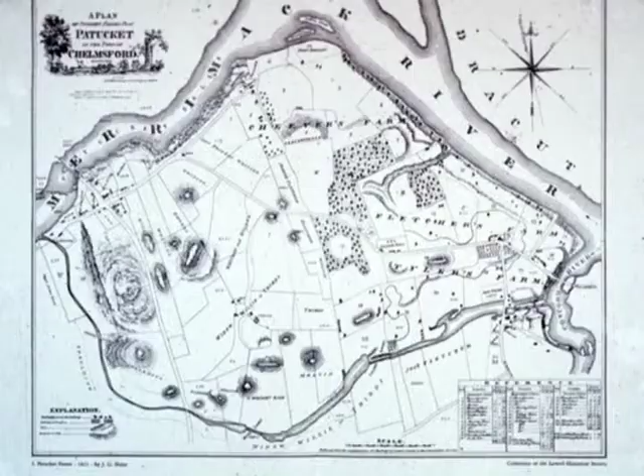In 1821, the situation in this area was shown on a map by Hales. And this particular map identifies the falls. You can see the Pawtucket Canal, which goes around the falls and into the Concord just before its junction with the Merrimack. And there's also an interesting feature on here. There's a contour line, which is the height of the river above the falls. And that's really important in the planning of the mills that would be put in place here.

The Boston Associates secretly bought most of the land between the Pawtucket Canal and the river. They then formed a new corporation, the Merrimack Manufacturing Company, to manufacture textiles. And they placed its first mill to use the full drop of 30 feet. So they're putting that mill over here, and they're going to use this transportation canal to feed a series of power canals. The Merrimack Manufacturing Company, with this full drop, had what they considered an ideal location.

But they had plans for up to 60 mills in all. So this is really going to be an enormous transformation. This particular image came from the Center for Lowell History. And this next map came from the Lowell National Park collection. This is a map of Lowell in 1825.

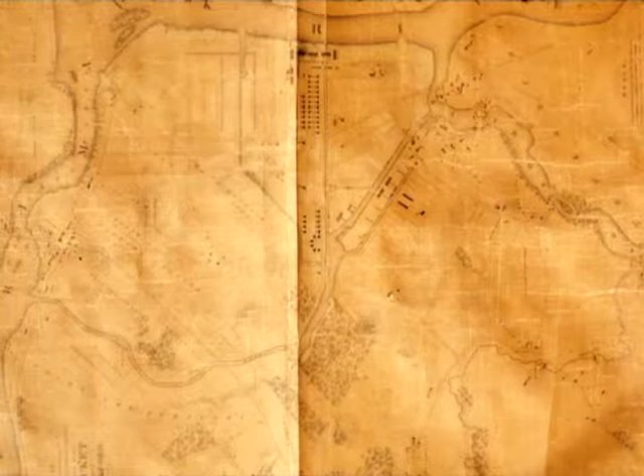Chuck Parrott, who's here today, was co-supervisor with me of the Historic American Engineering Record Survey in Lowell. And we discovered this map in the basement of the Boott Mill and in the operation that was then known as Boott Hydro. And this is a map that conveys the canal system, not only as it was in 1825, but as it would be in all of the construction that was planned for the immediate future. And in fact, it took them until 1836 to complete all of the canals.

The falls are here, the Pawtucket Canal is here, feeding this network of power canals. And this planned system is not the simple parallel plan that we saw at Waltham and we would see later at Lawrence. Instead, it makes use of this existing Pawtucket Canal, and it ends up with a rather complex network of water power canals on 2 levels.

In 1824, just before that map was produced, they had begun to tentatively plan for a change in the operations in Lowell. In 1825, the Merrimack Manufacturing Company decided to sell land and lease water power to other corporations. In 1824, they were still thinking about expansion and perhaps considering operating all of the new mills themselves. But they decided that they would set up the old Proprietors of Locks and Canals as a land agent, construction firm, machine builder, and lessor of water power. And they were going to be leasing water power to other corporations. And the first sale was to the Hamilton Manufacturing Company.

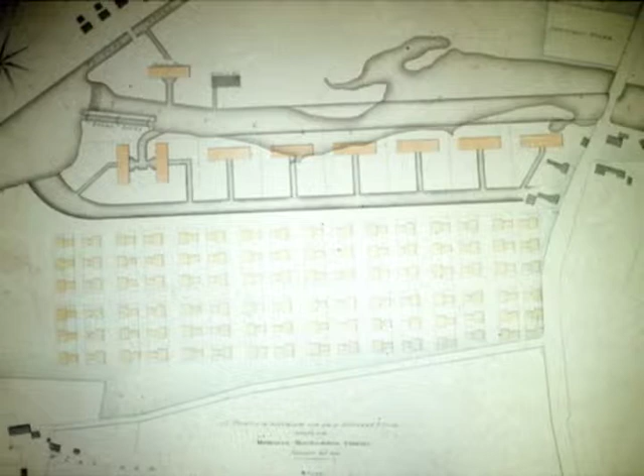And this plan represents the ideal layout of mills, but on a relatively small scale. So we see a drop created here at the Swamp Locks, which would be a 13-foot drop, from an upper-level Pawtucket Canal to a lower-level Pawtucket Canal. And we see a new power canal, which would be called the Hamilton Canal, which would feed an entire set of mills, both the Hamilton Mills in 1825 and the Appleton Mills in 1828. And we also see the planning for boarding houses, which would be across the canal. So this was a rational layout.

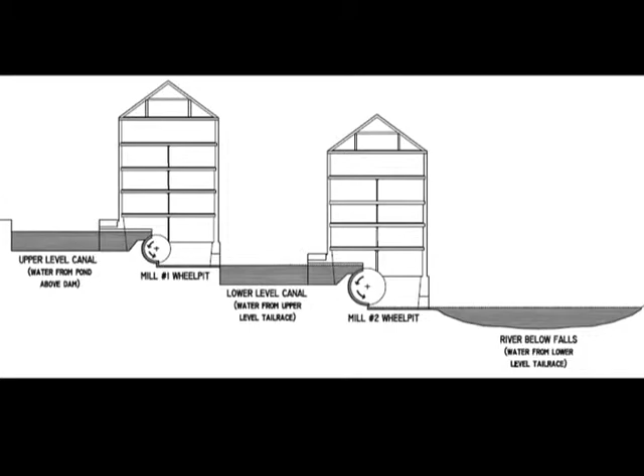We also can see their plan to constrain the rather unruly Pawtucket Canal and to ideally narrow it down to about 60 feet wide and 8 feet deep. So this ideal system involved 2 levels. And Chuck Parrott produced this drawing for me to demonstrate the 2-level concept. And I think this is the first time someone's produced a schematic that's easy to understand that shows you how

the 2-level system worked. Essentially, you bring the water through an upper-level canal, which is carrying it at the same level as it would be in the mill pond above the falls. You bring that to the first mill, and the water would go onto a vertical water wheel in this case and drop 13 feet.

It would then go into a lower level canal, and the water would then be used again. It would drop 17 more feet through the lower level canal and finally discharge into the river below the falls. So this is a total drop of 30 feet, but only the Merrimack Manufacturing Company was getting the full drop. Everyone else was going to get either 13 or 17.

The engineers in Lowell determined the flow rate that would provide the same amount of power on each level if you leased the power by mill powers. 1 mill power was defined as the amount of power used to drive the machinery in the second mill at Waltham, a mill of 3,584 spindles that used about 54 net horsepower.

So the engineers found that for the full drop at the Merrimack, you needed 25 cubic feet per second. For the 17-foot drop, you needed 45.5 cubic feet per second. And for the 13-foot drop, you needed 60.5 cubic feet per second. And each of those flow rates would give you 1 mill power.

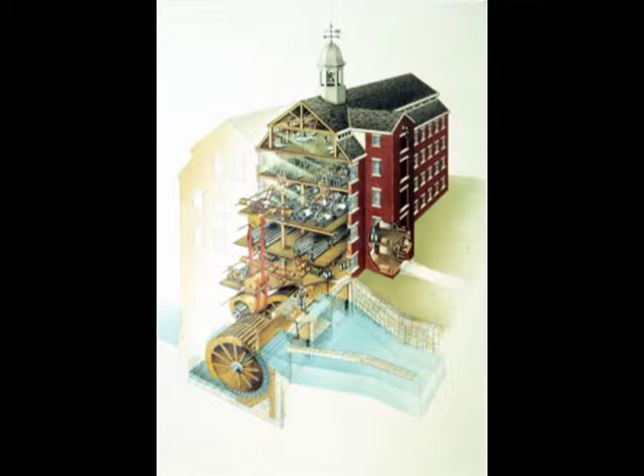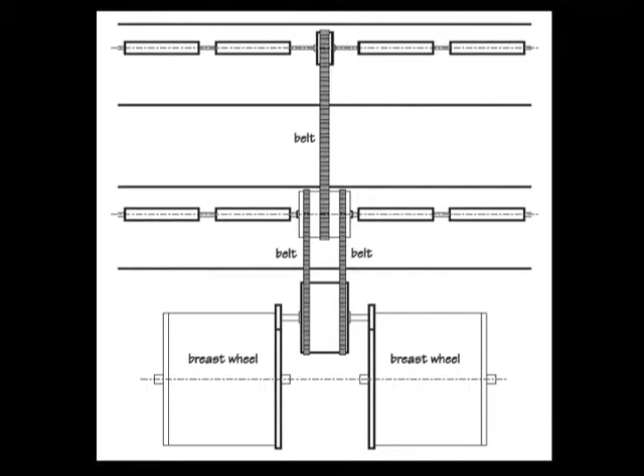In David Macaulay's book, Mill, and I consulted with David on that book as well, there's some really excellent diagrams that explain how the flyball governor system works. You also can see in this drawing the main belt drive, which is a system of transmission of power from the breast wheels in the basement up to the machinery on the floors above. And here you see some of that machinery, and you can see that layout.

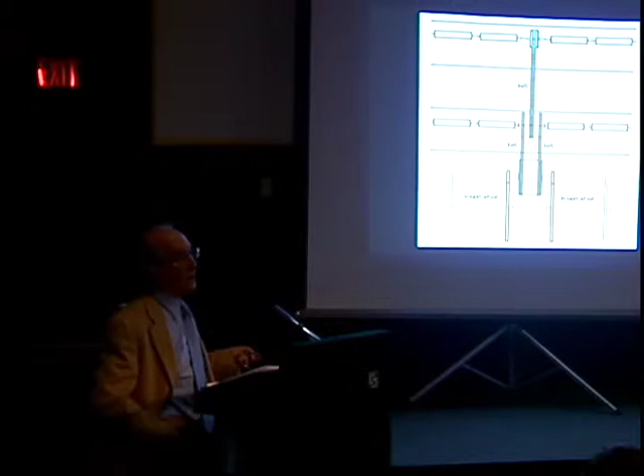And once again, you can see this diagram, which is based on a drawing by Ithamar Beard, who worked in Lowell in the 1830s. Now, we also have a model in the Boott Mill of the Boott Mill, or one of the Boott Mills, in the 1840s. I worked on this model with a number of other scholars, and we think that we had figured out exactly how many machines of each type were in the mill, how large the pulleys had to be to make all of the speeds that were appropriate for manufacturing. And if you go to the Boott Mill, you can really see the full system of production with this model.

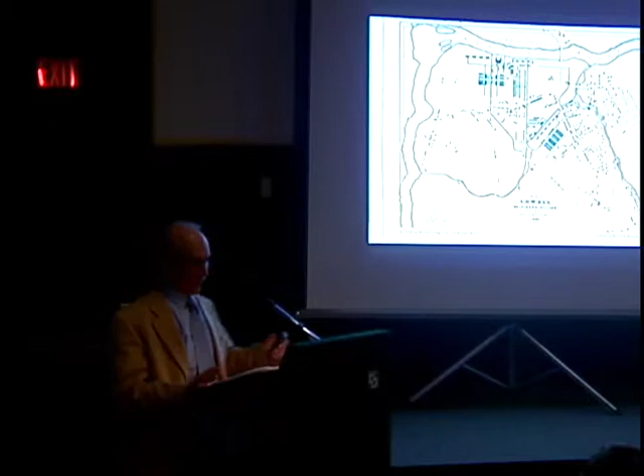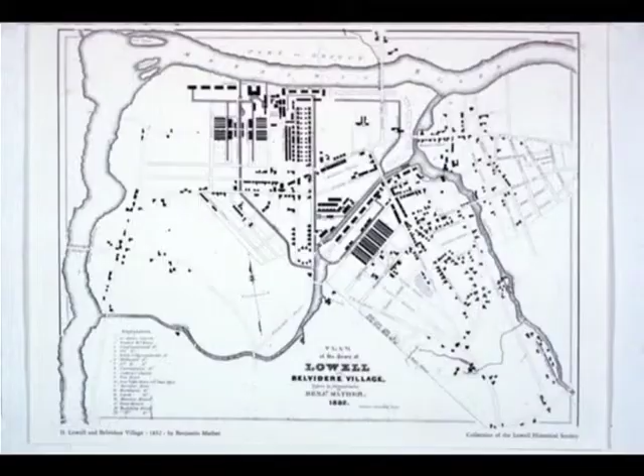The map of Lowell in 1832 gives you a good sense of how quickly the city was growing. This is a city that begins as a rural area with small country mills and perhaps 200 people in all in 1821. And by 1826, when East Chelmsford becomes a town called Lowell, there were 2,500 people. By 1836, when Lowell became a city, it had expanded in size to 17,600 and was one of the fastest growing cities in the United States. By 1850, there were 33,000 people, and it was the second largest city in Massachusetts. It went on to grow throughout the 19th century, reaching 90,000 in 1900 at the turn of the century.

So this map shows you that the canal system was right in the middle of the community, strongly affecting the urban plan and the daily lives of the citizenry. Here in this map, you see all the canals and mills that would be built by 1836. The map itself is 1832, but it shows you the Eastern Canal, which was the last of the canals shown on the 1825 map, and it would not be completed until 1836.

You also see the private construction that was helping to make this a boom town, but not a true company town. The textile corporations were tremendously influential, but other people who were not working for the corporations were coming to Lowell. Lowell's power canals were edges or barriers obstructing communication.

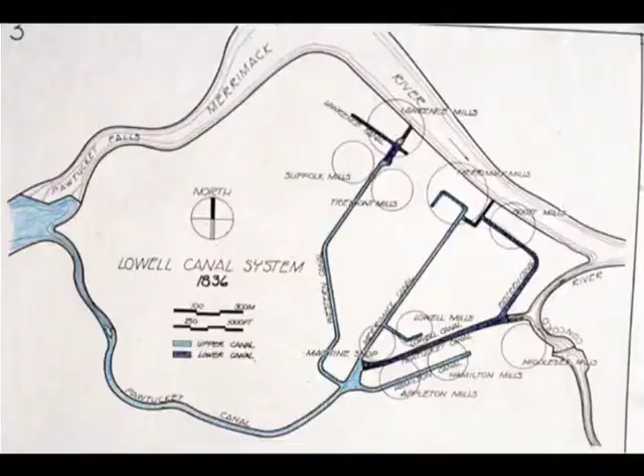The Historic American Engineering Record produced a number of engineering drawings of particular features of the canal, but it also produced a set of schematics, which have been used in a number of publications. And this is one of the system maps or schematics for 1836. And what we've done here is to tint this so that the lower level is dark blue, the upper level is light blue. But here you see the two levels that we talked about in the previous diagram.

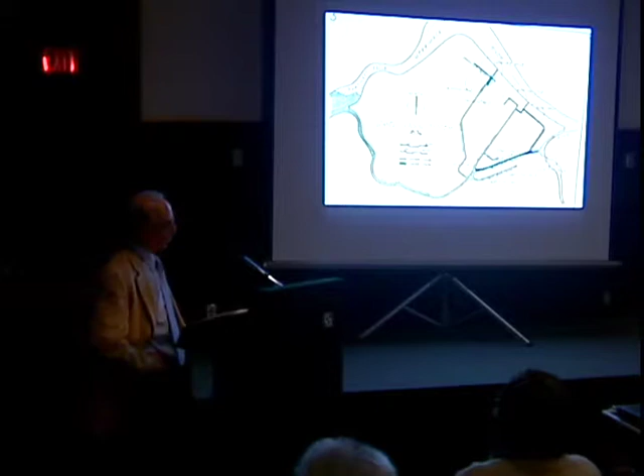The corporations in Lowell created one of the most complex power canal systems ever built. Engineers designed the system on a radial layout with two levels and drops, as we've seen, of 30, 17, and 13 feet. And this shows the first stage of development up to 1836. The two-level system had to be in dynamic equilibrium to make full use of the power from the river. Waste occurred whenever one level used more power than the other.

On this diagram, as we can see, the upper level in light blue is feeding the lower level in dark blue. The mill complexes, as of 1836, are circled. Water entered from the river and flowed down the Pawtucket Canal to the power canals on the upper level. And discharge from those, except for the Merrimack, fed the lower level mills.

So you would have, for instance, water coming in at an upper level going through the Hamilton and Appleton mills and then into the lower level Pawtucket and running down to the Eastern, and there it would feed the Boott mills, and from the lower level Pawtucket, it would feed the Middlesex mills, which was the only complex on this system that was also drawing power from the Concord River. The Concord River had 3 drops in this period and had its own much smaller canal system, the Wamesit Canal.

Water power was far more important than steam power during the initial stages of the American Industrial Revolution, and it was the key factor in the siting and physical development of many American manufacturing cities, including Lowell, Lawrence, and Manchester on the Merrimack River. The 1880 census called the Merrimack, quote, the most noted water power stream in the world, unquote. As Thoreau said in 1839, there was a city on each successive plateau, a busy colony of human beaver around every falls.

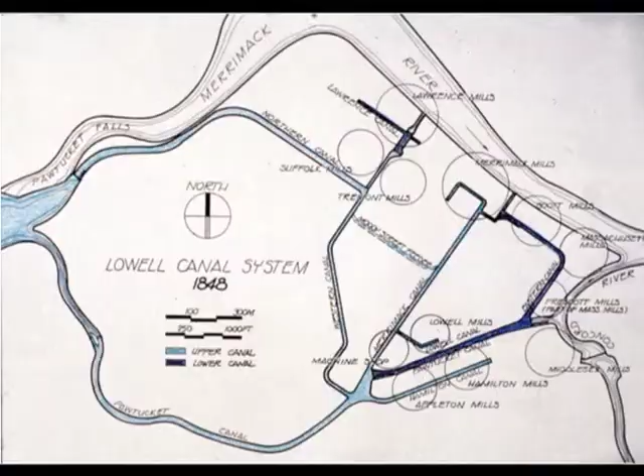And the Proprietors of Locks and Canals were then leasing a total of 91 mill powers, which is substantially more than their original estimate of 60. But that was still not enough to meet the demand, particularly in the summer. And many mills were using more than their leases allowed. The system was strained. The solution to this water power shortage involved improvements to the entire drainage basin and construction of another canal and an underground feeder.

So that canal is this Northern Canal, which they had been planning since 1839, but which they began to build in 1846 and 47. And they also built, in 1848, the Moody Street feeder, which was a shortcut from the Western Canal over to the Merrimack Canal.

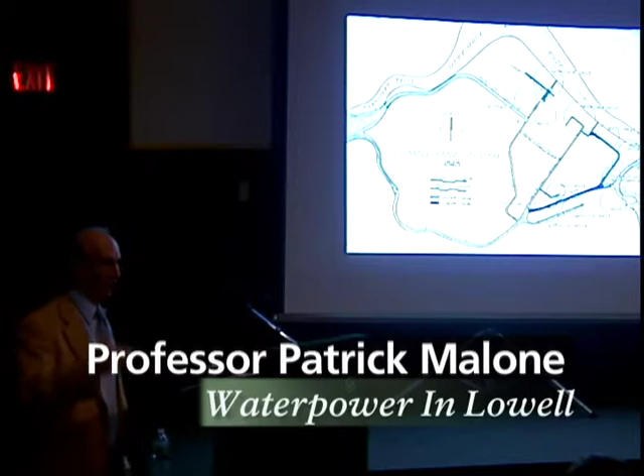So once the Northern Canal was in place, this large waterway could carry water much more efficiently with less drop in the water. Friction head loss was a major problem in Lowell. Water would brush against the sides of the canal, and the water level in the canal would actually drop. So with a more efficient canal coming in, and also with the Pawtucket Canal still in use, they could lower the current and reduce the friction head losses.

They would bring the water in the Northern Canal and supply the Tremont and the Suffolk and the Lawrence at this point. Then they'd reverse the current in the Western Canal and send it down to the Swamp Locks, where it would join the flow from the Pawtucket to satisfy all of these mills. And they could, after 1848, bring it underground, under Moody Street, over to the Merrimack Canal.

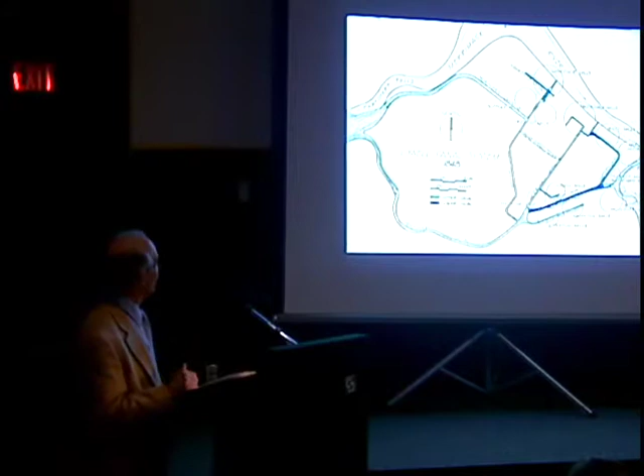The system could really use this new development, but Francis had to be sure that the mills would be willing to let him pond water at night behind the dam. The corporations had to promise that they wouldn't run at night so that they could make this enormous investment in construction. And that way they could draw the pond down somewhat during the daytime, and at night it would refill.

Once Francis had this agreement, and once he had control of the northern lakes, he rebuilt the dam at Pawtucket Falls, and he added this canal. The total project cost more than $500,000 between 1846 and 1848. And the total power went from 91 mill powers to 137 mill powers, an increase of over 50%. And if we really think about the potential power here, with improvements in turbines and improvements in other features of the system in coming decades, this amounted to almost 10,000 net horsepower.

The map shows the Northern Canal in place, and we see how this really could improve the operation of the entire system. The Northern Canal was James Francis's greatest professional triumph, and it remains one of the landmarks of American engineering. This 1847 dam that you see here channeled water into the efficient Northern Canal through a gatehouse with the first operational turbine that Francis designed. Mixed flow turbines today are still called Francis turbines. He and Uriah Boyden, who was also from Lowell, were instrumental in the development of the hydraulic turbine.

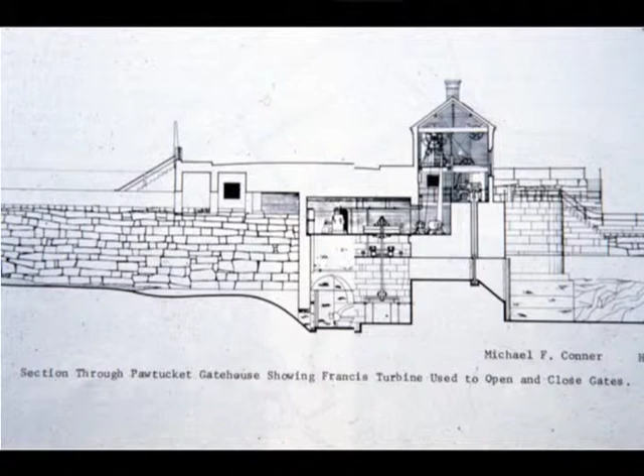And what Francis really wanted to do was to operate this very efficiently so that if water was scarce, you could even close it over the lunch hour. The gates were really large and heavy, and to do that manually would have been difficult. And Francis wanted to experiment with a new type of turbine anyway. So what he does here, in addition to building this gatehouse, is really to create what I think is today America's oldest industrial research laboratory. It has built-in features for hydraulic experiments on turbines, weirs, and nozzles.

The experimental turbine that Francis installed here to run the gates could adjust those gates very, very quickly, even, as I said, shutting them at noon. So this is a drawing done during the Historic American Engineering Record Survey, and it shows the gatehouse, and these are the gates. And then this is the turbine, the first Francis turbine, and then a main belt drive system that controls the gates.

I was kind of curious whether that Francis turbine might really still be in that gatehouse. And after doing some research in the mid-1970s, I couldn't find any evidence that it had ever been moved. So I decided that I would go look at it, and I set a day that I was going to do it, and I do what I say, even if the Patriots end up in a playoff game. So it turned out that day was a flood. It wasn't a good day, it was cold, and I needed some help to go down and investigate this. So I got two Brown football players who needed extra credit in my course really badly.

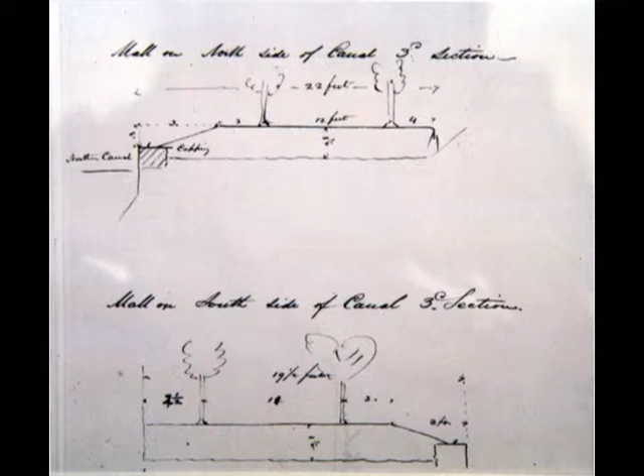And then you see the Great River Wall, because in order to put this canal through, not only was tremendous excavation necessary in this section, but you had to build a wall, in effect a dam, that could hold the water more than 30 feet above the river. So here Francis built the Great River Wall, which was 36 feet high, and he landscaped it with elms and other trees and shrubs.

Francis is planning the mall because he wants people to promenade, to really take advantage of the natural setting and of the sublime. And in those days, sublime meant really kind of awesome or frightening view. So you would go through the landscaped mall and then out onto this Great River Wall, which was one of the most impressive vistas in America.

And the construction of this was tremendously difficult. This river wall required up to 1,000 men working on the canal. So this was a construction project that rivaled almost anything else in America.

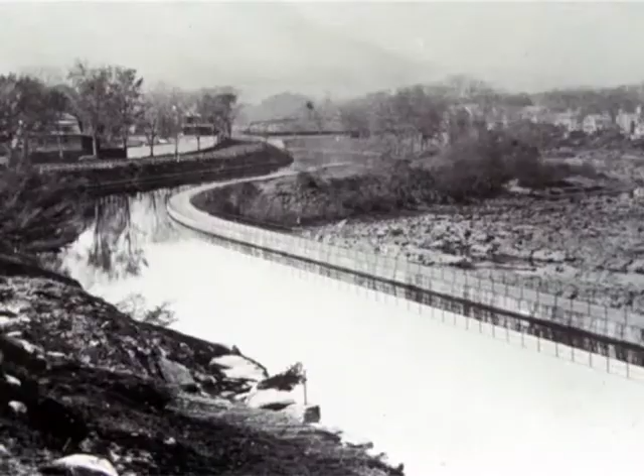This photograph shows you a slightly different view, and it contrasts this. Here you can see the spring freshet with water wasting over the dam. Francis just hates that. Any water that goes by, any water for a fish, for instance, is wasted water. So what he wants to see is this, which is closer to the image I showed you earlier in Cohoes.

This is all of the flow of the Merrimack coming through the canal. And at night, this would continue because they would fill the mill pond at night. So sometimes it might be weeks before there would be any flow of water through the rapids.

Now, people who did promenade on the Great River Wall were really astounded by the view. And D. Hamilton Hurd explained the appeal of the Northern Canal and its walkway. He said, not only for solidity and strength alone is it worthy of our admiration, but its green banks adorned with double colonnades of trees and its attractive promenades with the waters of the Merrimack dashing by afford to the eye a very pleasant prospect and display to the visitor a picturesque scene of no ordinary beauty.

All of us recognize that industrialization came with social and environmental costs, some of which we will continue to pay for centuries. But this was another face of industry, a softer side that made room for flowering plants and green space. In addition to landscaping company property, engineers and industrialists played key roles in the urban parks movement.

The owners and managers of the major corporations in Lowell were concerned about their public image and about the aesthetic and recreational aspects of the built environment they were creating. Most believed that workers would be healthier and more satisfied with their employment if they had opportunities to stroll down attractive walkways and breathe fresh air.

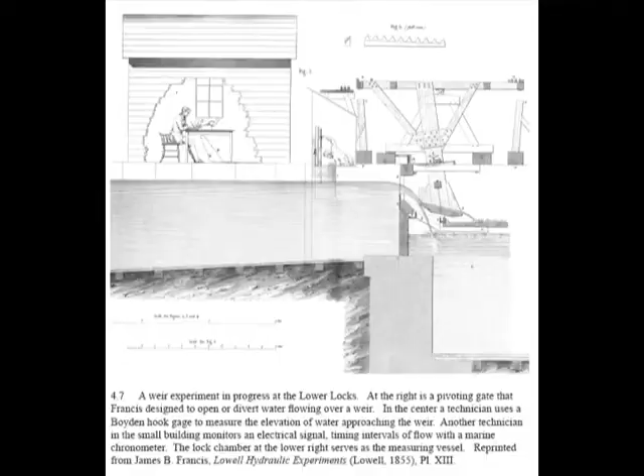Francis, in his experiments, wanted to actually test the engineering theories of the age. He didn't trust theoretical engineering. He believed in empirical testing. And he also believed in testing full size. So he did experiments that were incredibly expensive, such as this one at the lower locks, where he converted an entire chamber at the lower locks into a measuring basin. And this is the lower lock chamber that will measure water.

And what he does is let water flow over a weir for an interval of time. And he can precisely determine that interval of time with this gate that he can open and close rapidly to cut off the flow of water. And from that gate, there is an electrical line, in effect a telegraph line, to this small building. And inside it, an operator with a marine chronometer can measure the exact amount of time that water flowed over the weir. They then can measure the water in the lock chamber, and they can measure the exact height of the water over the weir using this hook gauge that Uriah Boyden developed.

And with this, Francis is able to refine and improve the weir formula, which is really the key formula in hydraulic engineering. And it's this formula that allows him to test turbines, and it's this formula that allows him to develop methods for measuring flow on the canal system. The weir formula used by Francis is still considered the best and is still in regular use by hydraulic engineers and hydrologists.

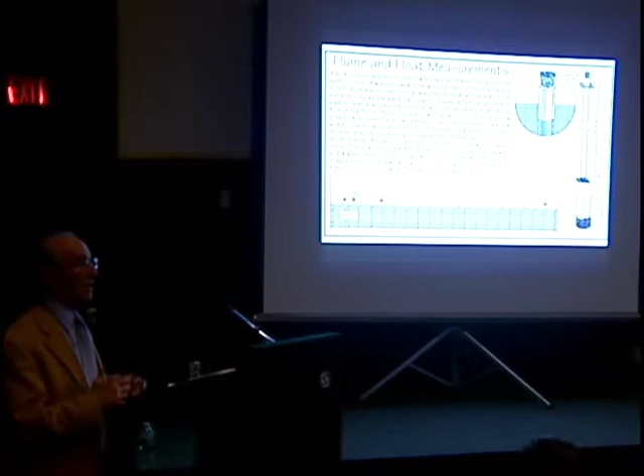So I had one of my students draw an image to explain this, and it's explained in the book. I put it in the sidebar so not everyone would have to deal with it. In fact, I put the entire set of hydraulic experiments and flow measurements in a separate chapter. So if you read the book and don't want to learn a lot about the hydraulic engineering, you can follow the narrative, I think, quite well and just skim chapter 4.

Also, this was the only way my editor would let me put this explanation in the book. He said, put a line around it and warn people they don't have to read it.

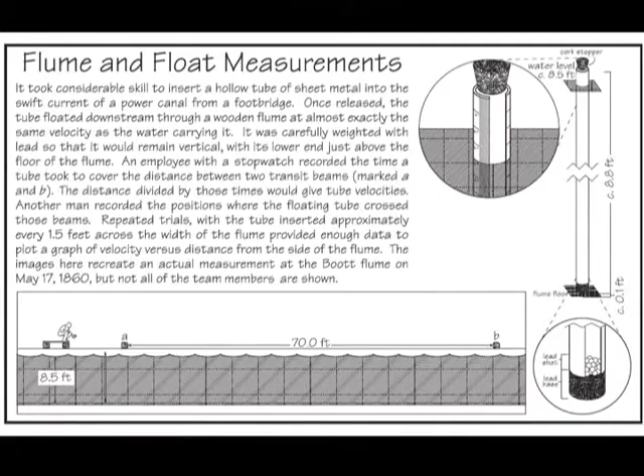So this shows the tube measurement. And we know this works because Chuck Parrott and I built a model of this, and we actually tried it at the Tsongas Industrial History Center. And we used soda straws and small lead shot. And on a tiny scale, we tested it, and it really works. You can measure flow beautifully.

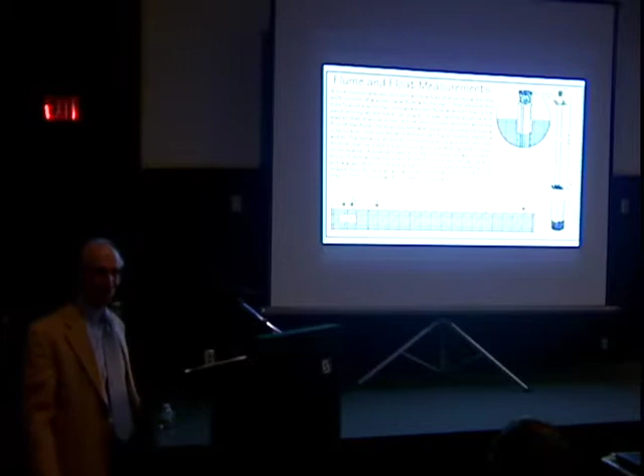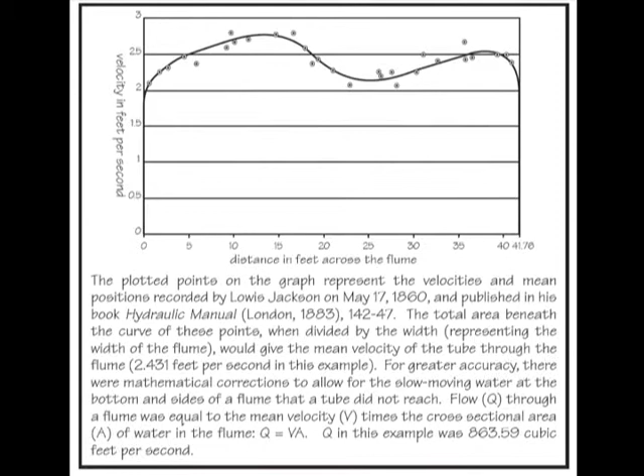And then you plot your calculations of speed, and then you figure out the area under the curve, which is another complex operation. And this is one part of the engineering where women were sometimes involved as calculators. They were considered very accurate. So that's the flume and float measurement system, which we're going to talk about in a later national park program this year. And this is one of the features that I think the people of Lowell appreciate most.

And Francis really kind of hesitated to do this. He had a problem with a flood in 1847 while he was building the northern gatehouse and the dam. And then in 1850, there was another flood. And at that point, there was some damage done to the bridge at the falls. And the owners of the bridge began to question whether the construction of the dam and the gatehouse was aggravating the flood situation. And at that point, I think Francis became a little worried about the liabilities.

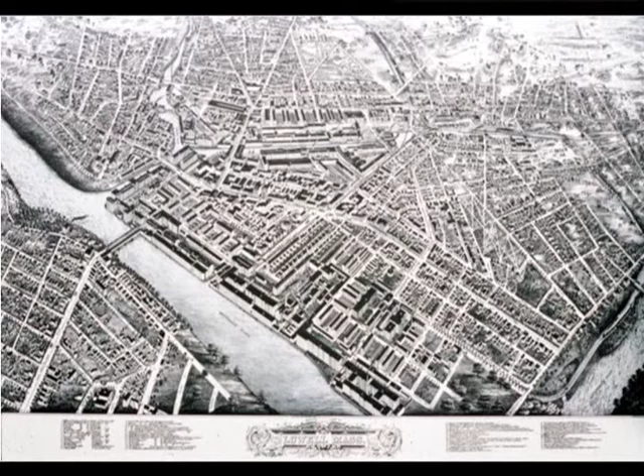In 1876, Lowell was an enormous industrial city with a great many mills and some 50,000 people. And you can see here the Northern Canal and the promenade that was still in place. And you can see some of the trees, these dots for trees.

But all of the great mill complexes eventually adopted hybrid power systems using both steam and water. Because if they wanted to increase their capacity for production, they had really used up the available water power. Also, they wanted to use surplus water, which wasn't available all year. So if the surplus water ran out in August, they needed some other power source that could fill in temporarily till they could go back to the surplus water. So they needed steam engines.

And these steam engines were really important in actually promoting the use of surplus water. Steam could replace water whenever flow in the river was low, or it could work when there was a great flood, which is also a problem for water power generation. And the exhaust from steam engines could heat mills and assist in processes like printing and dyeing. But the problem here is obvious: we have coal smoke, which is very unhealthy. And you can see the air pollution that resulted from the development of extensive steam operations in Lowell.